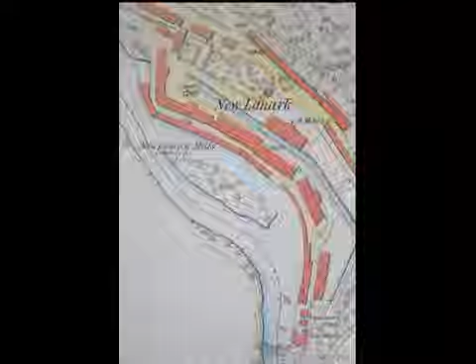That is that there's a dam, there's a power canal that runs from the dam downstream, parallel to the river. And between the power canal and the river, there are a whole series of mills, multiple mills, all being driven by this one power canal. This was the largest water power site in Britain, but Lowell would make this site really look minuscule.

Waltham was the testing ground for the later industrial development in Lowell. Mills built in 1813 and 1817 for the Boston Manufacturing Company were on a power canal that was parallel to the river. This plan was similar in conception to New Lanark, and the success of textile operations in Waltham led to a search for a manufacturing site with much more water power and with room for development.

So these are the two mills. You can't see the power canal, but it's running in front of those mills. And here is the dam and the falls on the Charles River. But this was a site that really had inadequate water power. Not very far away, however, was a site that had much more potential.

The great city of Lowell exists because of the Pawtucket Falls of the Merrimack River, which are 27 miles from Boston, as you all know. The falls had the potential to produce almost 10,000 horsepower year-round, and there was a drop here of some 30 feet. Pawtucket, or more properly East Chelmsford, Massachusetts, was the site of colonial farms and small-scale mills. The falls were spectacular, but they seemed impossible to harness and hindered transportation on the Merrimack River.

This particular image came from the Center for Lowell History. And this next map came from the Lowell National Park collection. This is a map of Lowell in 1825. Chuck Parrott, who's here today, was co-supervisor with me of the Historic American Engineering Record survey in Lowell. And we discovered this map in the basement of the Boott Mill and in the operation that was then known as Boott Hydro.

And this is a map that conveys the canal system, not only as it was in 1825, but as it would be in all of the construction that was planned for the immediate future. And in fact, it took them until 1836 to complete all of the canals. The falls are here, the Pawtucket Canal is here, feeding this network of power canals. This planned system is not the simple parallel plan that we saw at Waltham and we would see later at Lawrence. Instead, it makes use of this existing Pawtucket Canal, and it ends up with a rather complex network of water power canals on 2 levels.

In 1824, just before that map was produced, they had begun to tentatively plan for a change in the operations in Lowell. In 1825, the Merrimack Manufacturing Company decided to sell land and lease water power to other corporations. In 1824, they were still thinking about expansion and perhaps considering operating all of the new mills themselves. But they decided that they would set up the old Proprietors of Locks and Canals as a land agent, construction firm, machine builder, and lessor of water power. They were going to be leasing water power to other corporations.

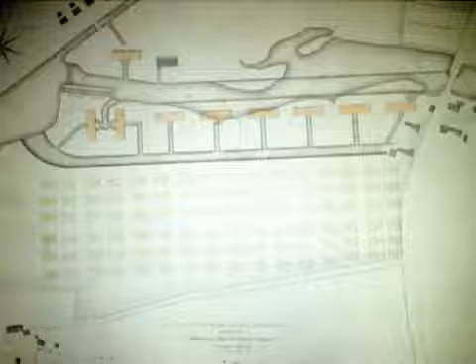And the first sale was to the Hamilton Manufacturing Company. And this plan represents the ideal layout of mills, but on a relatively small scale. So we see a drop created here at the Swamp Locks, which would be a 13-foot drop, from an upper-level Pawtucket Canal to a lower-level Pawtucket Canal. And we see a new power canal, which would be called the Hamilton Canal, which would feed an entire set of mills, both the Hamilton Mills in 1825 and the Appleton Mills in 1828. And we also see the planning for boarding houses, which would be across the canal. So this was a rational layout.

We also can see their plan to constrain the rather unruly Pawtucket Canal and to ideally narrow it down to about 60 feet wide and 8 feet deep. So this ideal system involved 2 levels. And Chuck Parrott produced this drawing for me to demonstrate the 2-level concept. And I think this is the first time someone's produced a schematic that's easy to understand that shows you how the 2-level system worked. Essentially, you bring the water through an upper-level canal, which is carrying it at the same level as it would be in the mill pond above the falls.

You bring that to the first mill, and the water would go onto a vertical water wheel in this case and drop 13 feet. It would then go into a lower-level canal, and the water would then be used again. It would drop 17 more feet through the lower-level canal and finally discharge into the river below the falls. So this is a total drop of 30 feet, but only the Merrimack Manufacturing Company was getting the full drop. Everyone else was going to get either 13 or 17.

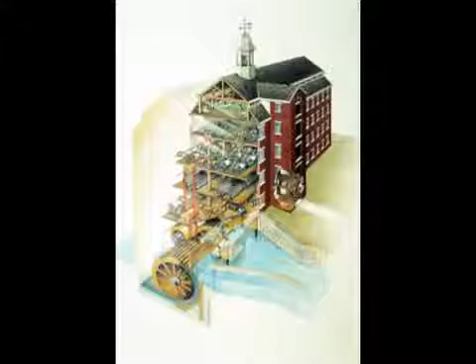I worked on this drawing with the National Geographic for their Historical Atlas of the United States, working with an illustrator from Scientific American. And this shows a typical Lowell mill of the 1840s. And we can see here the two breast wheels, which are being automatically governed by a flyball governor, which responds to changes in power demand in the mill to keep the speed of the shafts in the mill running at

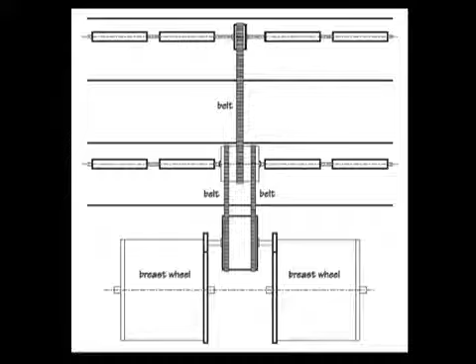the ideal speed. In David Macaulay's book, Mill, and I consulted with David on that book as well, there's some really excellent diagrams that explain how the flyball governor system works. You also can see in this drawing the main belt drive, which is a system of transmission of power from the breast wheels in the basement up to the machinery on the floors above. And here you see some of that machinery, and you can see that layout. And once again, you can see this diagram, which is based on a drawing by Ithamar Beard, who worked in Lowell in the 1830s.

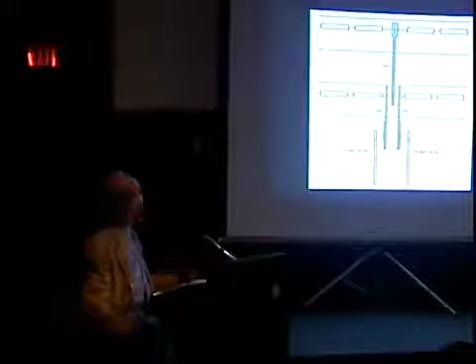Now, we also have a model in the Boott Mill of the Boott Mill, or one of the Boott mills, in the 1840s. And I worked on this model with a number of other scholars, and we think that we had figured out exactly how many machines of each type were in the mill, how large the pulleys had to be to make all of the speeds that were appropriate for manufacturing. And if you go to the Boott Mill, you can really see the full system of production with this model.

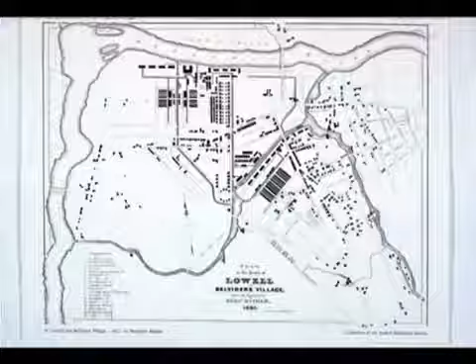This map of Lowell in 1832 gives you a good sense of how quickly the city was growing. This is a city that begins as a rural area with small country mills and perhaps 200 people in all in 1821. And by 1826, when East Chelmsford becomes a town called Lowell, there were 2,500 people. By 1836, when Lowell became a city, it had expanded in size to 17,600 and was one of the fastest growing cities in the United States. By 1850, there were 33,000 people, and it was the second largest city in Massachusetts. It went on to grow throughout the 19th century, reaching 90,000 in 1900 at the turn of the century.

So this map shows you that the canal system was right in the middle of the community, strongly affecting the urban plan and the daily lives of the citizenry. Here in this map, you see all the canals and mills that would be built by 1836. The map itself is 1832, but it shows you the Eastern Canal, which was the last of the canals shown on the 1825 map, and it would not be completed until 1836.

You also see the private construction that was helping to make this a boom town, but not a true company town. The textile corporations were tremendously influential, but other people who were not working for the corporations were coming to Lowell. Lowell's power canals were edges or barriers obstructing communication. The canals forced lengthy detours to available bridges, cut off neighborhoods, and created physical and social boundaries in the city. The Irish neighborhood in the Acre was in many ways the other side of the tracks, but it was literally the other side of the Western Canal, which branched from the Pawtucket Canal. You can see the Western here.

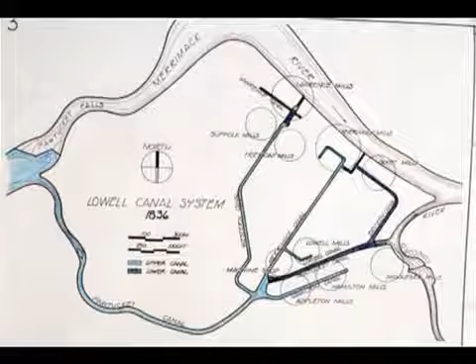The Historic American Engineering Record produced a number of engineering drawings of particular features of the canal, but it also produced a set of schematics, which have been used in a number of publications. And this is one of the system maps or schematics for 1836. And what we've done here is to tint this so that the lower level is dark blue, the upper level is light blue. Here you see the two levels that we talked about in the previous diagram.

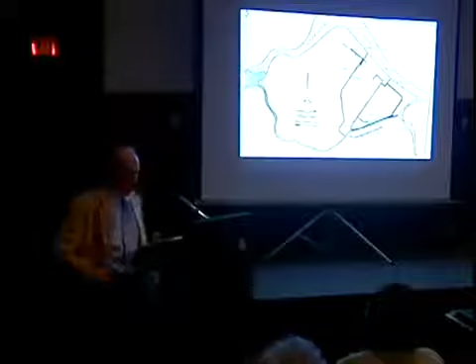The corporations in Lowell created one of the most complex power canal systems ever built. Engineers designed the system on a radial layout with two levels and drops, as we've seen, of 30, 17, and 13 feet. And this shows the first stage of development up to 1836. The two-level system had to be in dynamic equilibrium to make full use of the power from the river. Waste occurred whenever one level used more power than the other.

On this diagram, as we can see, the upper level in light blue is feeding the lower level in dark blue. The mill complexes, as of 1836, are circled. Water left the river and flowed down the Pawtucket Canal to the power canals on the upper level. And discharge from those, except for the Merrimack, fed the lower level mills.

So you would have, for instance, water coming in at an upper level going through the Hamilton and Appleton mills and then into the lower level Pawtucket and running down to the Eastern, and there it would feed the Boott mills, and from the lower level Pawtucket, it would feed the Middlesex mills, which was the only complex on this system that was also drawing power from the Concord River. The Concord River had 3 drops in this period and had its own much smaller canal system, the Wamesit Canal.

Water power was far more important than steam power during the initial stages of the American Industrial Revolution. And it was the key factor in the siting and physical development of many American manufacturing cities, including Lowell, Lawrence, and Manchester on the Merrimack River. The 1880 census called the Merrimack, quote, the most noted water power stream in the world, unquote. As Thoreau said in 1839, there was a city on each successive plateau, a busy colony of human beaver around every falls.

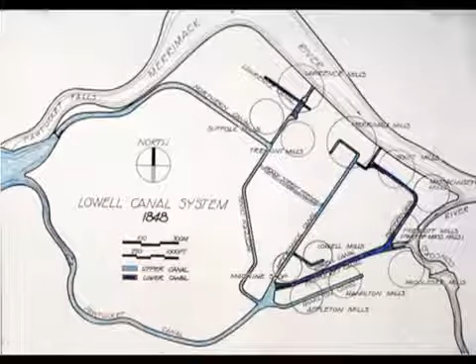And the proprietors of locks and canals were then leasing a total of 91 mill powers, which is substantially more than their original estimate of 60. But that was still not enough to meet the demand, particularly in the summer. And many mills were using more than their leases allowed. The system was strained. The solution to this water power shortage involved improvements to the entire drainage basin and construction of another canal and an underground feeder.

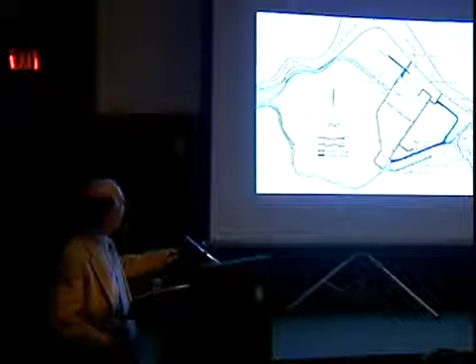So that canal is this Northern Canal, which they had been planning since 1839, but which they began to build in 1846 and 47. And they also built in 1848 the Moody Street feeder, which was a shortcut from the Western Canal over to the Merrimack Canal.

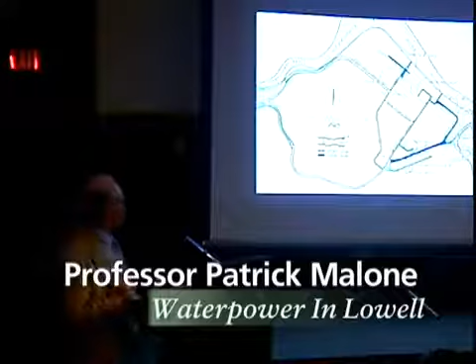So once the Northern Canal was in place, this large waterway could carry water much more efficiently with less drop in the water. Friction head loss was a major problem in Lowell. Water would brush against the sides of the canal, and the water level in the canal would actually drop. So with a more efficient canal coming in, and also with the Pawtucket Canal still in use, they could lower the current and reduce the friction head losses.

They would bring the water in the Northern Canal and supply the Tremont and the Suffolk and the Lawrence at this point. Then they reverse the current in the Western Canal and send it down to the Swamp Locks, where it would join the flow from the Pawtucket to satisfy all of these mills. And they could, after 1848, bring it underground, under Moody Street, over to the Merrimack Canal.

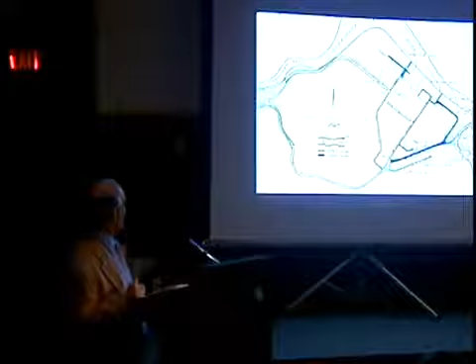The system could really use this new development, but Francis had to be sure that the mills would be willing to let him pond water at night behind the dam. The corporations had to promise that they wouldn't run at night so that they could make this enormous investment in construction. And that way they could draw the pond down somewhat during the daytime, and at night it would refill.

Once Francis had this agreement, and once he had control of the northern lakes, he rebuilt the dam at Pawtucket Falls, and he added this canal. The total project cost more than $500,000 between 1846 and 1848. And the total power went from 91 mill powers to 137 mill powers, an increase of over 50%.

And if we really think about the potential power here, with improvements in turbines and improvements in other features of the system in coming decades, this amounted to almost 10,000 net horsepower. The map shows the Northern Canal in place, and we see how this really could improve the operation of the entire system.

The Northern Canal was James Francis's greatest professional triumph, and it remains one of the landmarks of American engineering. This 1847 dam that you see here channeled water into the efficient Northern Canal through a gatehouse with the first operational turbine that Francis designed. Mixed flow turbines today are still called Francis turbines. He and Uriah Boyden, who was also from Lowell, were instrumental in the development of the hydraulic turbine.

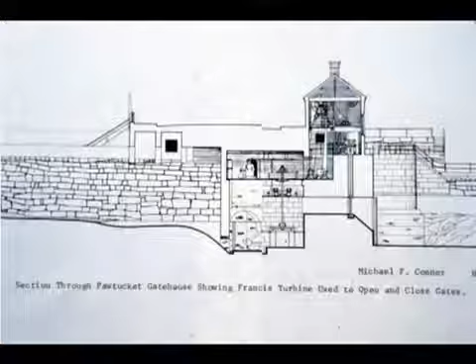The gates were really large and heavy, and to do that manually would have been difficult. And Francis wanted to experiment with a new type of turbine anyway. So what he does here, in addition to building this gatehouse, is really to create what I think is today America's oldest industrial research laboratory. It has built-in features for hydraulic experiments on turbines, weirs, and nozzles.

I was kind of curious whether that Francis turbine might really still be in that gatehouse. And after doing some research in the mid-1970s, I couldn't find any evidence that it had ever been moved. So I decided that I would go look at it, and I set a day that I was going to do it, and I do what I say, even if the Patriots end up in a playoff game during the call. So it turned out that day was a flood.

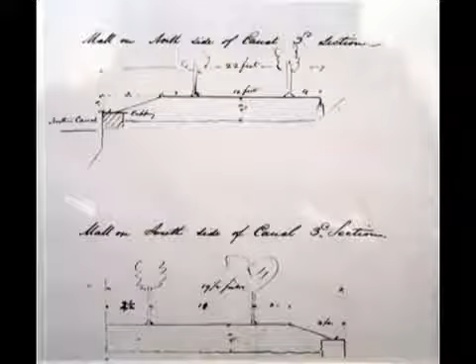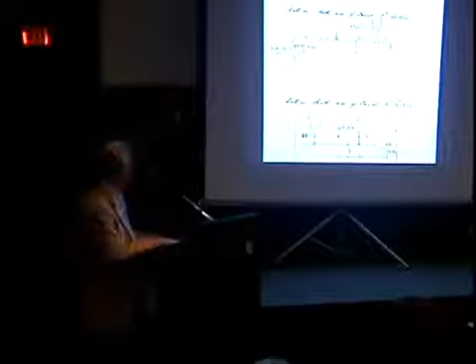Francis is planning the mall because he wants people to promenade, to really take advantage of the natural setting and of the sublime. And in these days, sublime meant really kind of an awesome or frightening view. So you would go through the landscaped mall and then out onto this Great River Wall, which was one of the most impressive vistas in America. And the construction of this was tremendously difficult. This river wall required up to 1,000 men working on the canal. So this was a construction project that rivaled almost anything else in America.

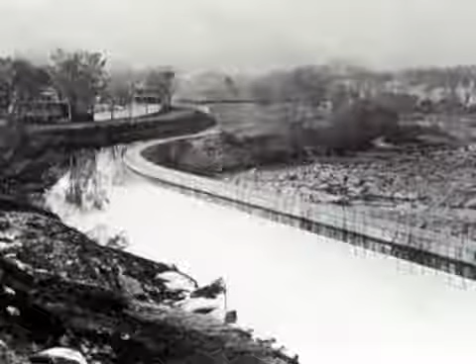This photograph shows you a slightly different view, and it contrasts this. Here you can see the spring freshet with water wasting over the dam. Francis just hates that. Any water that goes by, any water for a fish, for instance, is wasted water. So what he wants to see is this, which is closer to the image I showed you earlier in Cohoes. This is all of the flow of the Merrimack coming through the canal. And at night, this would continue because they would fill the mill pond at night. So sometimes it might be weeks before there would be any flow of water through the rapids.

Now, people who did promenade on the Great River Wall were really astounded by the view. And D. Hamilton Hurd explained the appeal of the Northern Canal and its walkway. He said, not only for solidity and strength alone is it worthy of our admiration, but its green banks adorned with double colonnades of trees and its attractive promenades with the waters of the Merrimack dashing by afford to the eye a very pleasant prospect and display to the visitor a picturesque scene of no ordinary beauty.

All of us recognize that industrialization came with social and environmental costs, some of which we will continue to pay for centuries. But this was another face of industry, a softer side that made room for flowering plants and green space. In addition to landscaping company property, engineers and industrialists played key roles in the urban parks movement. The owners and managers of the major corporations in Lowell were concerned about their public image and about the aesthetic and recreational aspects of the built environment they were creating. Most believed that workers would be healthier and more satisfied with their employment if they had opportunities to stroll down attractive walkways and breathe fresh air.

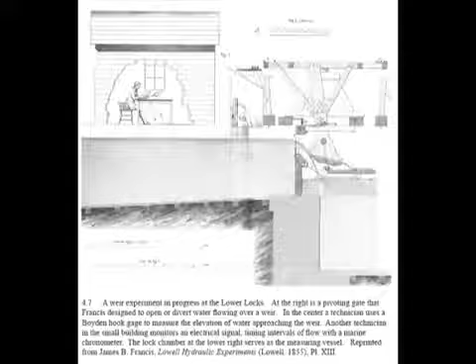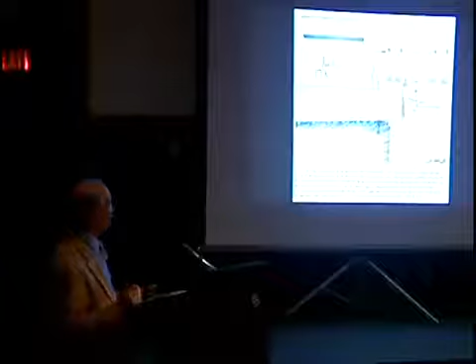Francis, in his experiments, wanted to actually test the engineering theories of the age. He didn't trust theoretical engineering. He believed in empirical testing. And he also believed in testing full size. So he did experiments that were incredibly expensive, such as this one at the lower locks, where he converted an entire chamber at the lower locks into a measuring basin. And this is the lower lock chamber that will measure water. And what he does is let water flow over a weir for an interval of time. And he can precisely determine that interval of time with this gate that he can open and close rapidly to cut off the flow of water.

And from that gate, there is an electrical line, in effect a telegraph line, to this small building. And inside it, an operator with a marine chronometer can measure the exact amount of time that water flowed over the weir. They then can measure the water in the lock chamber, and they can measure the exact height of the water over the weir using this hook gauge that Uriah Boyden developed. And with this, Francis is able to refine and improve the weir formula, which is really the key formula in hydraulic engineering. And it's this formula that allows him to test turbines, and it's this formula that allows him to develop methods for measuring flow on the canal system. The weir formula used by Francis is still considered the best and is still in regular use by hydraulic engineers and hydrologists.

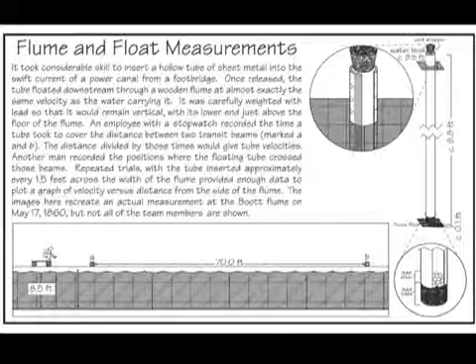So this shows the tube measurement. And we know this works because Chuck Parrott and I built a model of this, and we actually tried it at the Tsongas Industrial History Center. And we used soda straws and small lead shot. And on a tiny scale, we tested it, and it really works. You can measure flow beautifully.

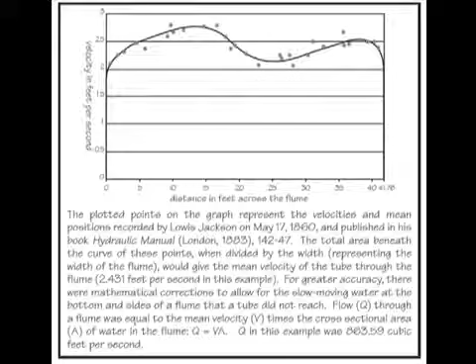And then you plot your calculations of speed, and then you figure out the area under the curve, which is another complex operation. And this is one part of the engineering where women were sometimes involved as calculators. They were considered very accurate. So that's the flume and float measurement system, which we're going to talk about in a later national park program this year. And this is one of the features that I think the people of Lowell appreciate most.

And Francis really kind of hesitated to do this. He had a problem with a flood in 1847 while he was building the northern gatehouse and the dam. And then in 1850, there was another flood. And at that point, there was some damage done to the bridge at the falls. And the owners of the bridge began to question whether the construction of the dam and the gatehouse was aggravating the flood situation. And at that point, I think Francis became a little worried about the liabilities.

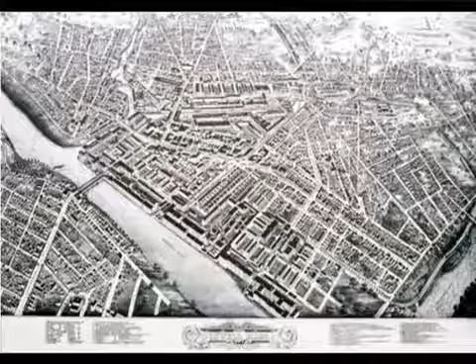In 1876, Lowell was an enormous industrial city with a great many mills and some 50,000 people. And you can see here the Northern Canal and the promenade that was still in place. And you can see some of the trees, these dots for trees. But all of the great mill complexes eventually adopted hybrid power systems using both steam and water, because if they wanted to increase their capacity for production, they had really used up the available water power.

Also, they wanted to use surplus water, which wasn't available all year. So if the surplus water ran out in August, they needed some other power source that could fill in temporarily till they could go back to the surplus water. So they needed steam engines. And these steam engines were really important in actually promoting the use of surplus water. Steam could replace water whenever flow in the river was low, or it could work when there was a great flood, which is also a problem for water power generation.

And the exhaust from steam engines could heat mills and assist in processes like printing and dyeing. But the problem here is obvious, that we have coal smoke, which is very unhealthy. And you can see the air pollution that resulted from the development of extensive steam operations in Lowell.

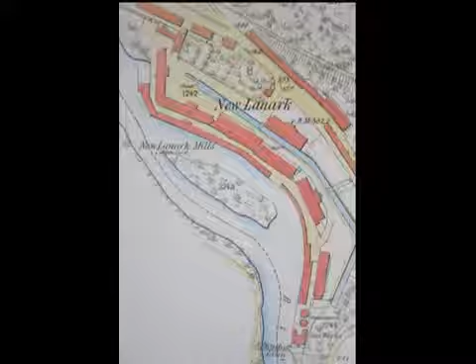A later period, about the mid-19th century, but it shows the particular canal development that was used here, and which I think influenced Nathan Appleton. That is that there's a dam, there's a power canal that runs from the dam downstream parallel to the river. And between the power canal and the river, there are a whole series of mills, multiple mills, all being driven by this one power canal.

This was the largest water power site in Britain, but Lowell would make this site really look minuscule. Waltham was the testing ground for the later industrial development in Lowell. Mills built in 1813 and 1817 for the Boston Manufacturing Company were on a power canal that was parallel to the river. This plan was similar in conception to New Lanark, and the success of textile operations in Waltham led to a search for a manufacturing site with much more water power and with room for development.

The great city of Lowell exists because of the Pawtucket Falls of the Merrimack River, which are 27 miles from Boston, as you all know. The falls had the potential to produce almost 10,000 horsepower year-round, and there was a drop here of some 30 feet. Pawtucket, or more properly East Chelmsford, Massachusetts, was the site of colonial farms and small-scale mills.

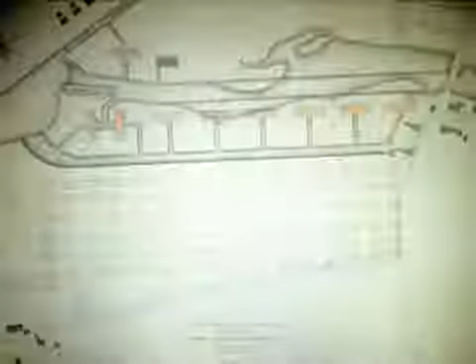In 1825, the Merrimack Manufacturing Company decided to sell land and lease water power to other corporations. In 1824, they were still thinking about expansion and perhaps considering operating all of the new mills themselves. But they decided that they would set up the old proprietors of locks and canals as a land agent, construction firm, machine builder, and lessor of water power. And they were going to be leasing water power to other corporations.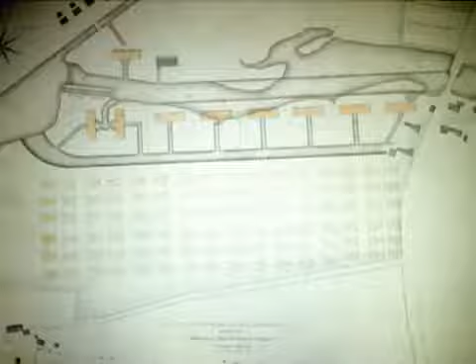And the first sale was to the Hamilton Manufacturing Company. And this plan represents the ideal layout of mills, but on a relatively small scale. So we see a drop created here at the swamp locks, which would be a 13-foot drop, from an upper-level Pawtucket Canal to a lower-level Pawtucket Canal. And we see a new power canal, which would be called the Hamilton Canal, which would feed an entire set of mills, both the Hamilton Mills in 1825 and the Appleton Mills in 1828.

And we also see the planning for boarding houses, which would be across the canal. So this was a rational layout. We also can see their plan to constrain the rather unruly Pawtucket Canal and to ideally narrow it down to about 60 feet wide and 8 feet deep. So this ideal system involved two levels.

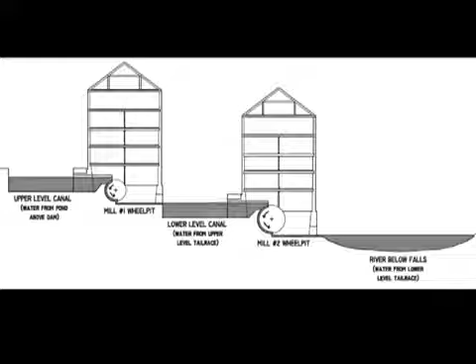And Chuck Parrott produced this drawing for me to demonstrate the two-level concept. And I think this is the first time someone's produced a schematic that's easy to understand, that shows you how the two-level system works. Essentially, you bring the water through an upper-level canal, which is carrying it at the same level as it would be in the mill pond above the falls. You bring that to the first mill.

We have with us today Dr. Pat Malone, who is a professor of urban studies and American civilization, and he's director of the Urban Studies program at Brown University. He is co-author of The Texture of Industry, an Archaeological View of the Industrialization of North America, and he is author of The Skulking Way of War, Technology and Tactics Among the New England Indians, also published by Johns Hopkins. So they gave me that in fine print, so I did the best I could.

Sorry, Pat. Anyway, all of us who work at the National Park on issues dealing with the Lowell Canal system constantly use Pat's work as a reference and a guide, and he's been called more than once for some advice on one arcane issue or another. So we are very pleased to be supportive of Pat's new book, and glad to welcome him to speak to us this afternoon. Pat Malone.

And this next map came from the Lowell National Park collection. This is a map of Lowell in 1825. Chuck Parrott, who's here today, was co-supervisor with me of the Historic American Engineering Record survey in Lowell. And we discovered this map in the basement of the Boott Mill, in the operation that was then known as Boott Hydro. And this is a map that conveys the canal system, not only as it was in 1825, but as it would be in all of the construction that was planned for the immediate future. And in fact, it took them until 1836 to complete all of the canals.

The falls are here, the Pawtucket Canal is here, feeding this network of power canals. This planned system is not the simple parallel plan that we saw at Waltham, and we would see later at Lawrence. Instead, it makes use of this existing Pawtucket Canal, and it ends up with a rather complex network of water power canals on two levels.

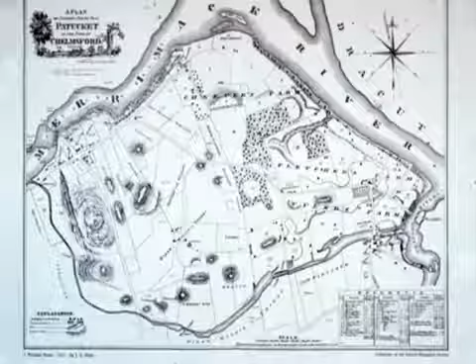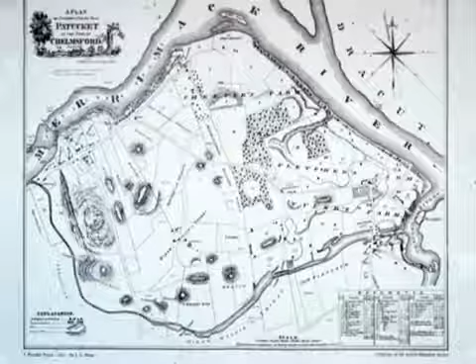In 1821, the situation in this area was shown on a map by Hales. And this particular map identifies the falls. You can see the Pawtucket Canal, which goes around the falls and into the Concord just before its junction with the Merrimack. And there's also an interesting feature on here. There's a contour line, which is the height of the river above the falls. And that's really important in the planning of the mills that would be put in place here. The Boston Associates secretly bought most of the land between the Pawtucket